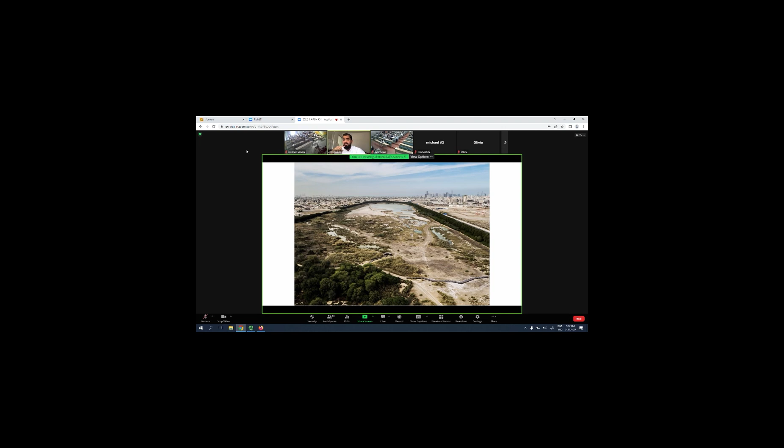But unfortunately, since it's in the middle of the city, many contractors started to use this site as a dump for their construction waste, and all these wonderful lagoons used to be a place where trash was left.

Unfortunately, it took a lot of effort to bring the project to its ultimate natural condition. So we started to put different strategies in place to tackle this, to conserve but also rehabilitate the whole area.

We started to create a wonderful buffer of trees to isolate it and create a clear boundary, stopping the encroachment of real estate developments. We have a lot of problems, especially in our part of the world, where overdevelopment is becoming a real issue.

You see everywhere being developed, used for real estate. It's really important to preserve and protect the natural assets we have. Such a case in the desert is very rare, and if it's gone, it's gone forever, which would affect the ecosystem since migrant birds come here.

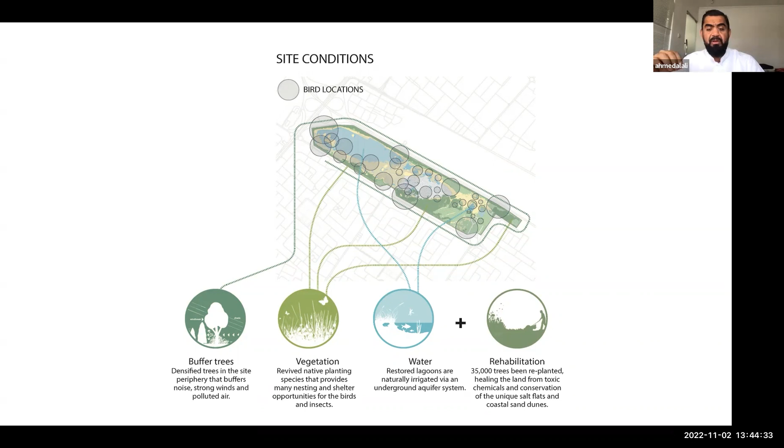So we started to plant almost 35,000 plants, from trees to shrubs, to heal the land. We restored the lagoons using irrigation naturally supplied via the underground aquifer system, bringing life back to the whole place.

As you see in this section, we started to create gradients. Of course when I say 'we', I mean the team of experts, landscapers, geologists, and specialists in bird behavior, creating this wonderful scaling down of the trees.

This created a gentle protection for the birds to feel very safe and be able to stay on the site, attracting these birds back to the area.

We also thought about how to make people aware of this beautiful site. It's not enough to do that, but also to educate people, the new generation, about the importance of such unique natural assets.

So we suggested creating a wonderful facility that could become a place for scientists or people who'd like to experiment, or bird lovers who would like to walk and view and examine the birds.

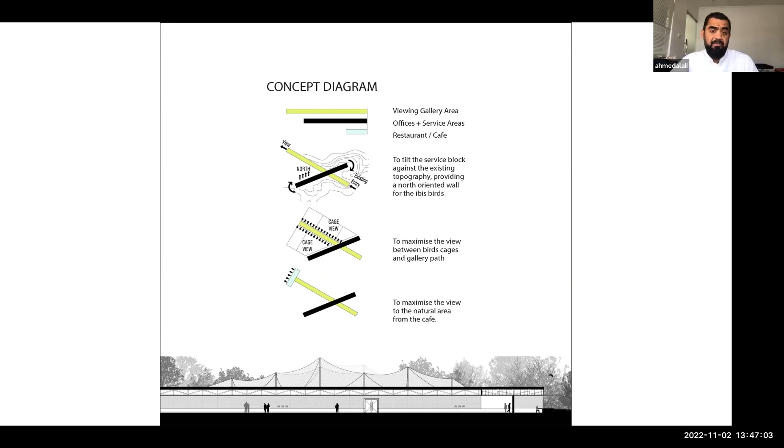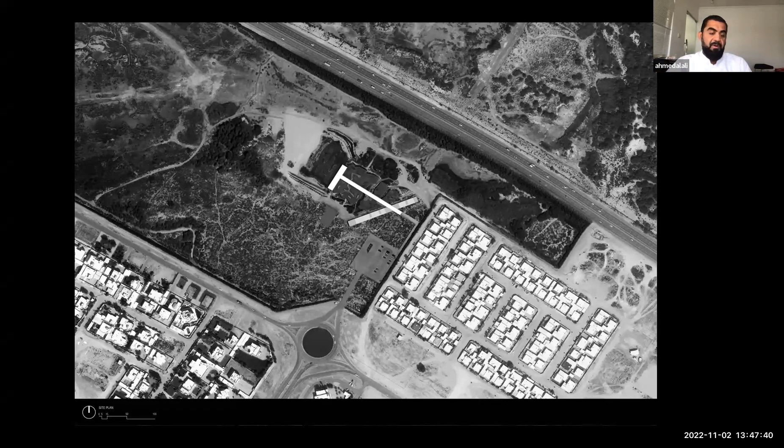So we decided to build close to the places that has already been damaged. We thought this is an opportunity to rehabilitate it also, and be able to limit the access of people at least to the beginning of the site and leave the rest for nature, but also educate people while they are in the facilities about the whole area and the importance of salt flats.

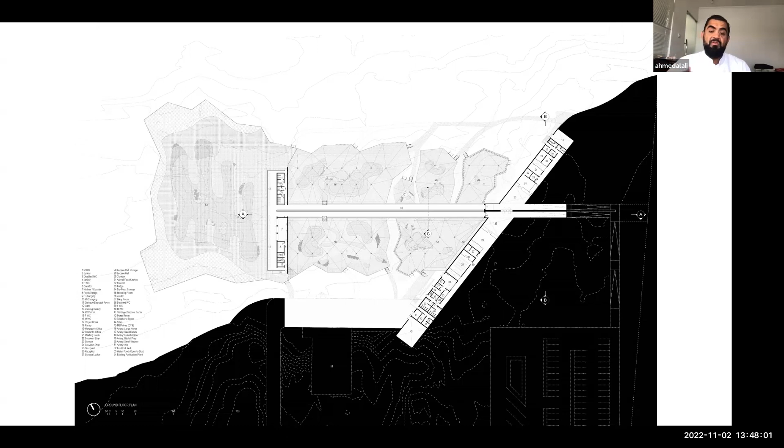Again, the design - I will explain the design. From the parking, we thought it will be interesting if you can really submerge yourself into the land and be able to enter into this wonderful world of birds. As you see in the section here, we started to create a very thin profile and submerge the building a bit, and create that kind of tent structure that allows us to free the birds in the larger, let's say, cage. So while you are walking, you are the one who are somehow caged in between the birds, and you could view them.

And that could be used, of course, in AC areas since it's very hot in our region. So even in the summer, you could use this facility, and you are the one who will be in an almost controlled environment, while the bird will be in its natural environment.

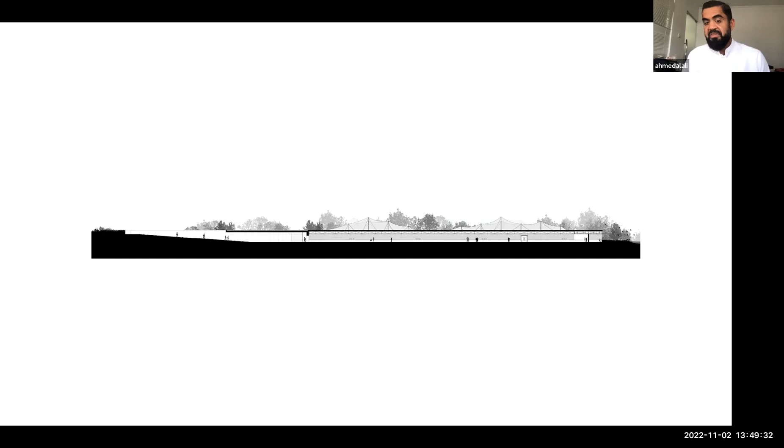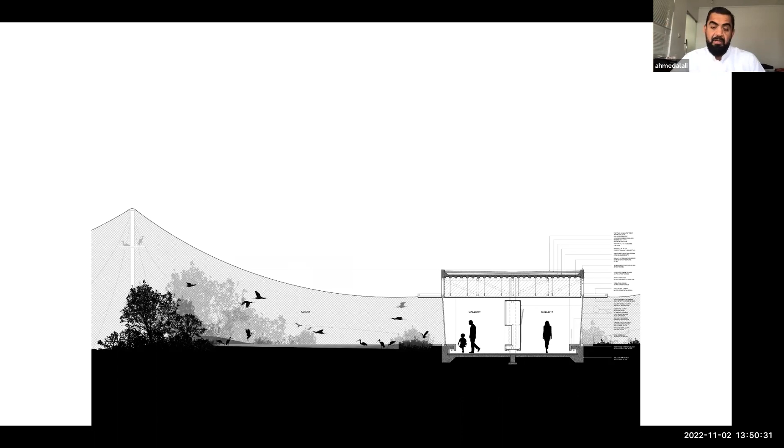What we did also - we produced this continuous seamless glass gallery, and we tilted the glass 5 degrees to be able to reflect the ground, so the birds will not really fly into the glass. This is a common problem when you have modern buildings, where the bird thinks it's a continuous space, so it usually bumps into the glass. So this is actually a small detail - that's the tiltation of the glass in the section here, and we created a darker room behind, so the reflection will be stronger, so the bird can see itself and could run away, and could also see the ground because of the tiltation.

Again, we started to bring the ground up - or the other way around, actually we sunk the walking areas. So the children have an eye level, almost an eye level, and relaxed level with the birds, so they could really see them very close to the gallery. And it's a nice feeling because you could feel the ground coming really.

I think in 2019 we took the Aga Khan Award for that project.

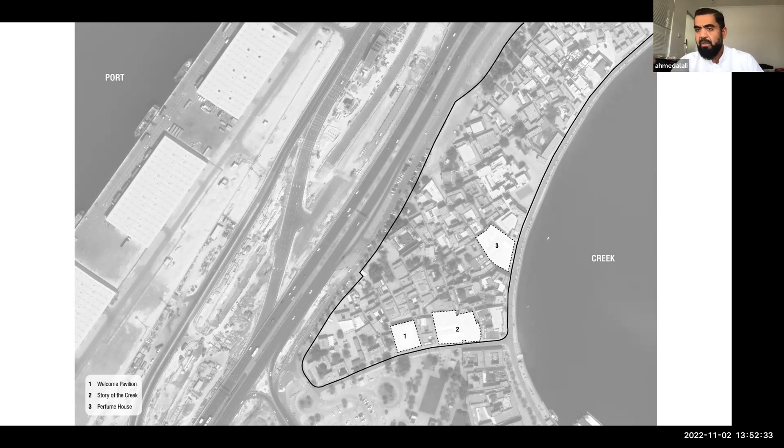Another project was in another context, which is the Shindagha area, where this beautiful vernacular architecture has developed around the seaside, the creek side. The client came to us and said, okay, we want to do something for Expo 2020, and we want to create one of the pavilions outside the Expo zone to receive people and make them aware of the traditional area.

So what we did - we thought, okay, it's wonderful, let's look at the history of this place and the materials that have been used, and what people used to do in that place. Apparently people used to have a good craft in carpentry and woodwork, building ships and creating also these barasti homes. We call it areesh - areesh is like a continuous roof structure made out of palm reeds. We thought that people used to be very skilled with wood, and this is really interesting.

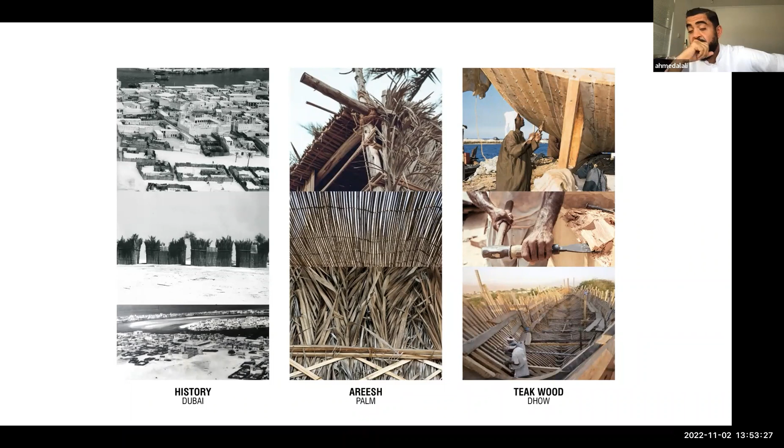They used to bring the wood, whether from the reeds or palm reeds on the surrounding oasis, or they used to bring teak wood from India and start to create ships with it. So we thought that, oh, that's interesting.

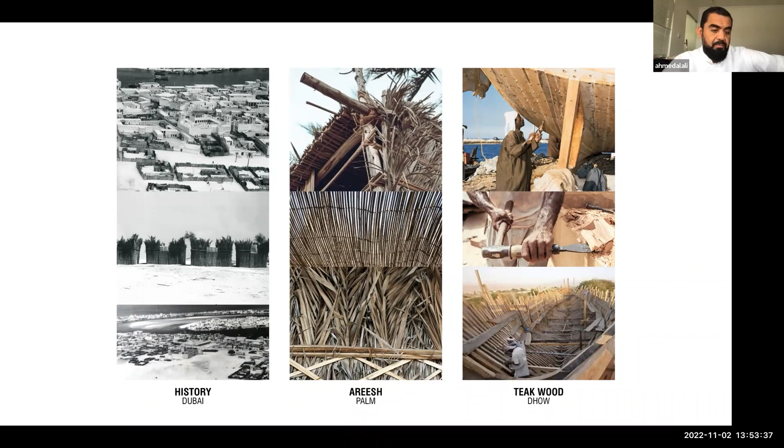Instead of really doing a modern building, there is a beautiful plaza where they want us to build this heavy kind of program. We said, all right, what about we create something that is very light, but also reminds people, in its form and meaning, of the craft and type of architecture used in this area, not in a literal sense, but in a creative and indirect way.

So we thought of really building a wonderful roof made out of teak wood to remember the crafts done in this area, but also arrange it in a way that could resemble the Areesh and create that kind of wonderful imperfection between one piece and another, allowing beautiful shade and shadow to cast on the ground.

And to control that environmentally, we started to think about a simple enclosure that can be folded and unfolded in the plaza, so areas spill into the plaza in the winter time, like now, November, December. But in the time of extreme heat, August, July, we could really enclose it and create a kind of enclosed AC space.

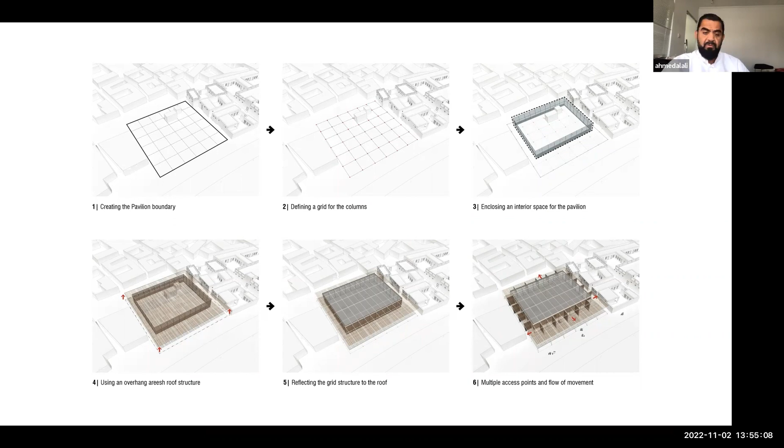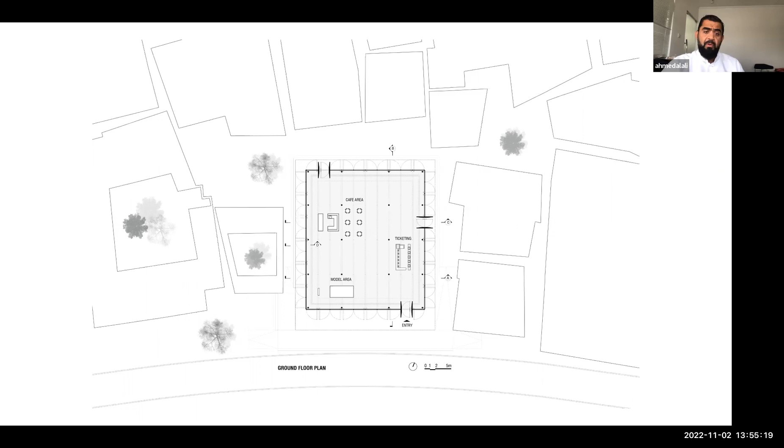So this is the plan, very simple. We intentionally kept it an open floor plan, so it does not disturb the surrounding mud buildings.

For the services, every building has a tremendous amount of services for AC, electrical, and so forth. In our region, usually the AC and ducting take a huge amount of space in the roof. If you want a nice, interesting roof that allows light to penetrate and create shade and shadow, you need to free the architecture as much as possible from these mechanicals. So we said, what about we create this kind of tunnel that is enough to service the AC and electrical wiring, and keep the plaza really open.

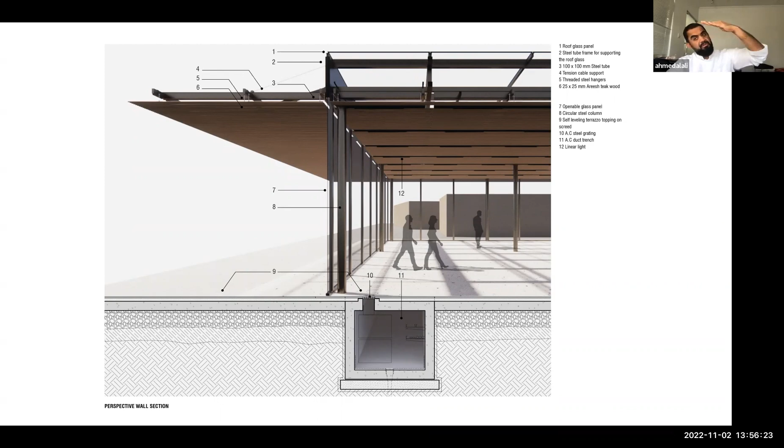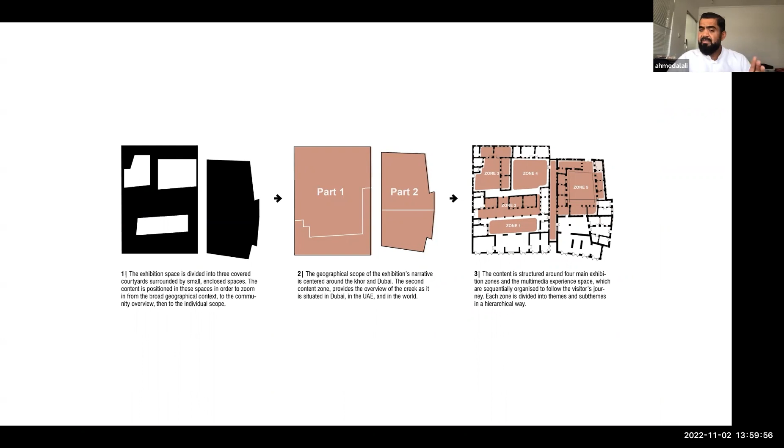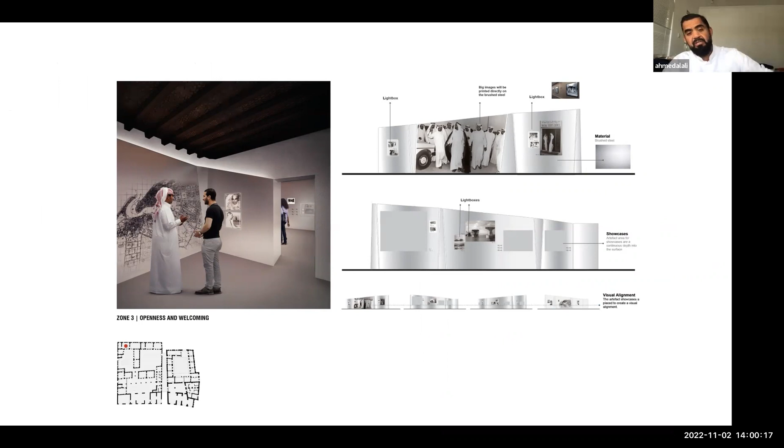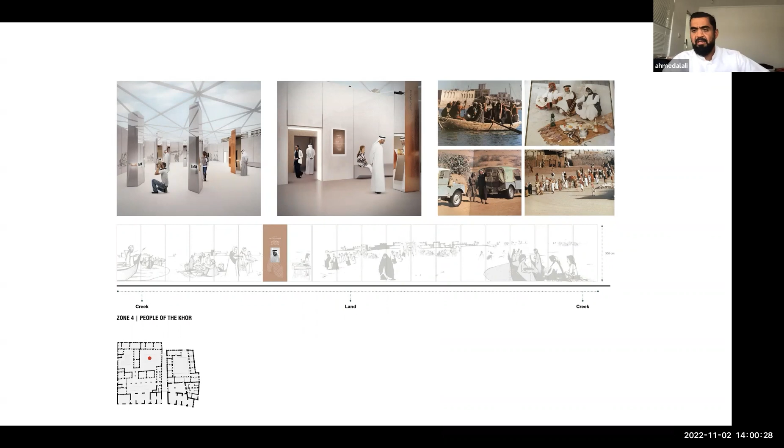Again, in the surroundings, we were responsible for turning some of the traditional houses into museums. One is a museum of traditional perfumes, and one is a museum of urban planning. So we started to take each building, understand its potential, and how you can reuse it for modern functions. There is a limitation to what you can do, but you can deal with it in a respectful way and empower some of the spaces, expressing some of the architectural elements around it. We used interpretive design, working closely with graphic designers on interpretation and storytelling to create and empower the space we were looking for.

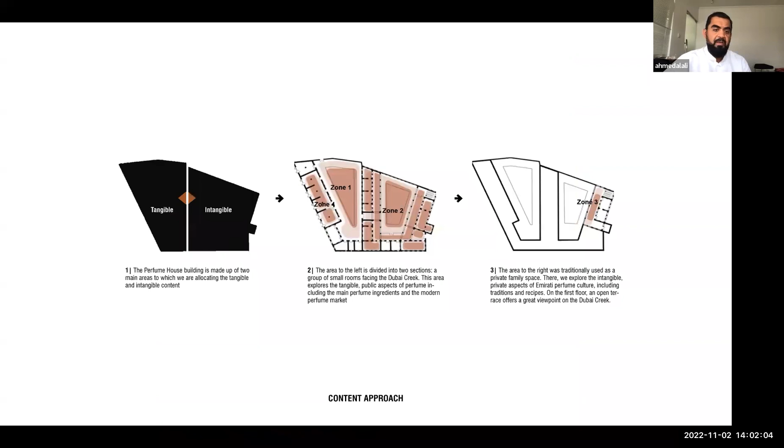Again, that's another building with also other challenges, turning some of the spaces into a usable modern gallery.

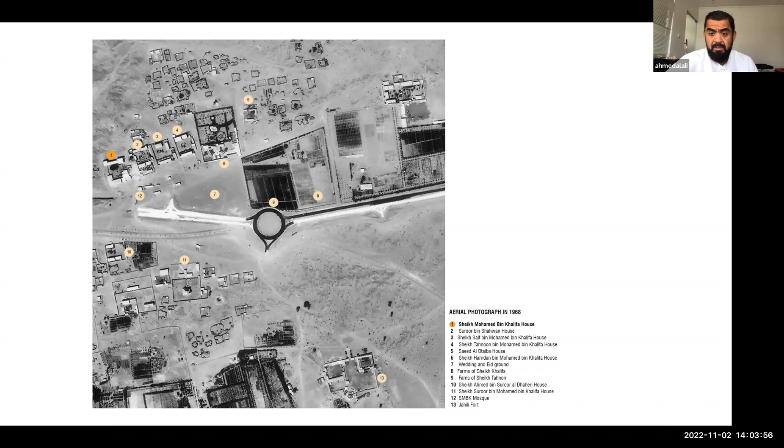Having said that, that house had been neglected for a long period of time. It's a house built in the 50s, built over time, and not built in the traditional form. Actually, it's an imported form from India and the coast of Zanzibar. You can see a lot of this kind of arcaded, wonderful arched palaces.

Having said that, it's a very important part of the modern history of the UAE. And it's built with concrete. We thought it's an interesting idea because it's built with concrete but also around a courtyard, which also resembles a kind of social form of architecture. It's been imported from India, which means there is also a history of culture in dealing with trade and all of that. We thought it was very important to keep that house for the legacy of the UAE and its multicultural connections to the region.

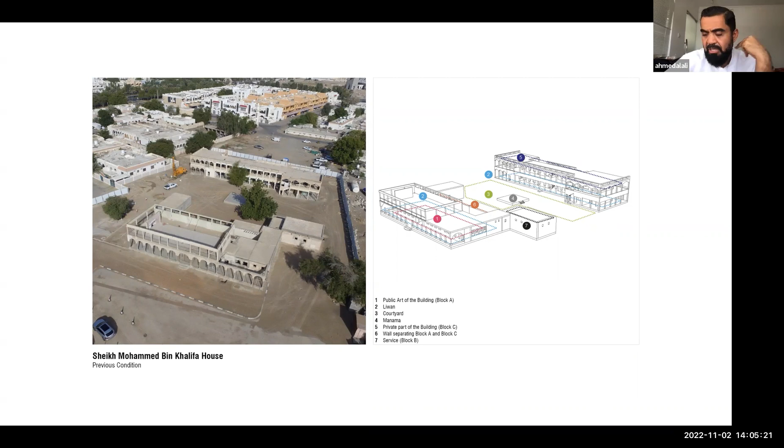So we started to document with the team of conservation and heritage people, and started to see the phases the house had been built in since 1957. It was built over time, using different kinds of methods.

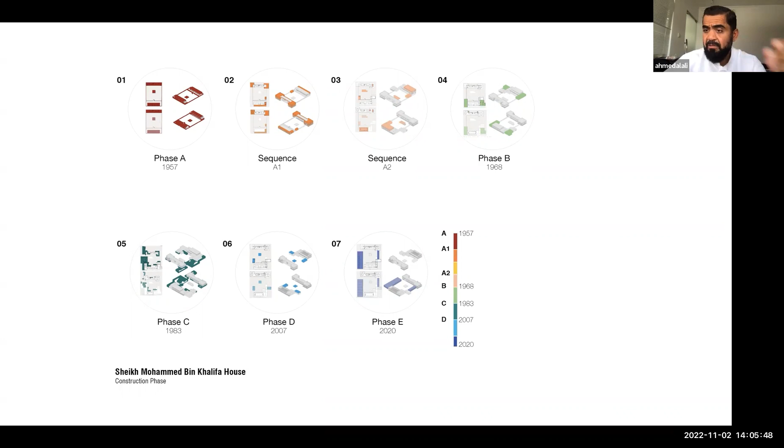Every time the client was expanding it, and we thought this is interesting because it's part of the history of the design itself. So Sheikh Mohammed bin Khalifa House, this is the condition it was in.

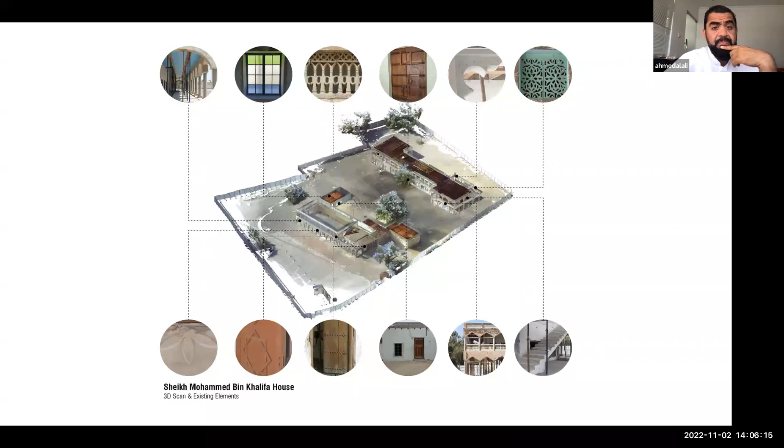Unfortunately, the roofs had collapsed, and most of the rooms' roofs had also collapsed. Some walls had also collapsed. If you see the smaller images, this is the condition the site was in. These are some images too. It was in very bad shape and required conservation in a big way, and also rehabilitation of the program.

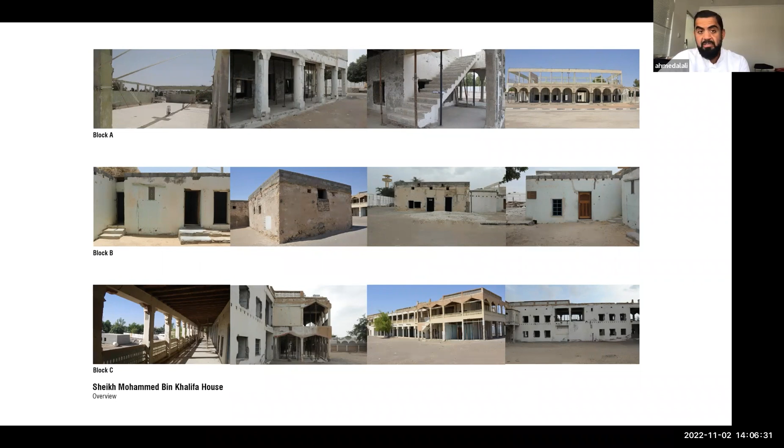So we started to categorize the beauty of the place, the materials, the colors being used. It's wonderful because wonderful palettes of materials have been used, wonderful palettes of geometries have been used. There are colors that are really striking, like a blue, sky blue color, or sometimes a light green color, and pink has been used in some of the rooms. We thought it's something to really keep in that heritage of the building.

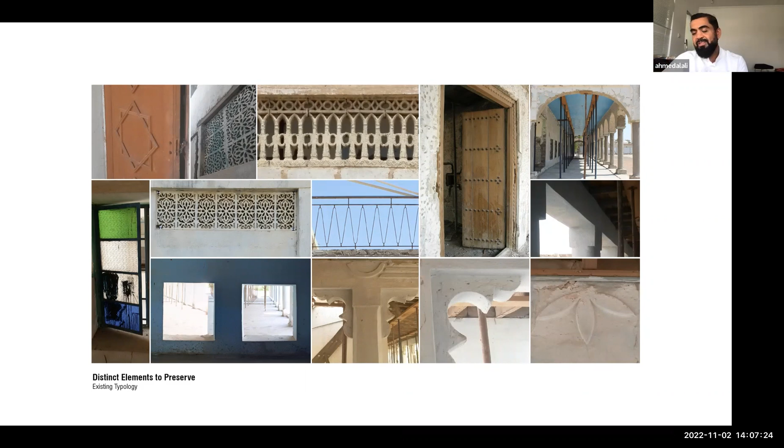Yet the doors, for example, if you see the wooden doors, are done in a completely traditional way. So we started to conserve, minimizing the work in areas that we are having destruction.

We started to conserve some of the decoration and elements, repair some of the things that had been damaged, like the frame in this case here. We started to repair it and replace it in the way it was originally designed. But then we come to places where we cannot repair, only replace.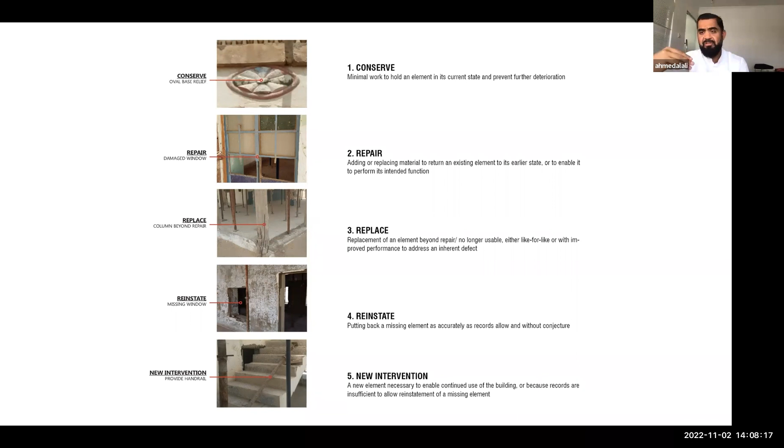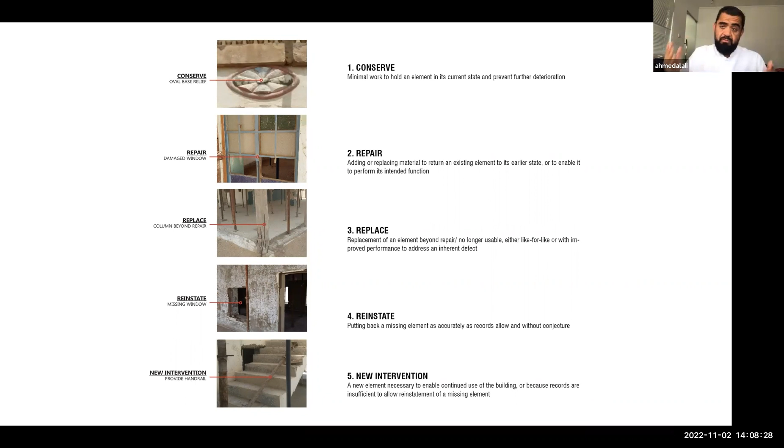This is the strategy that we have used. We started to replace some of the elements. For any elements required to replace, we chose either to do it the way it was, or we had the freedom to reinstate it and do something modern and interesting, but yet sensible to the place.

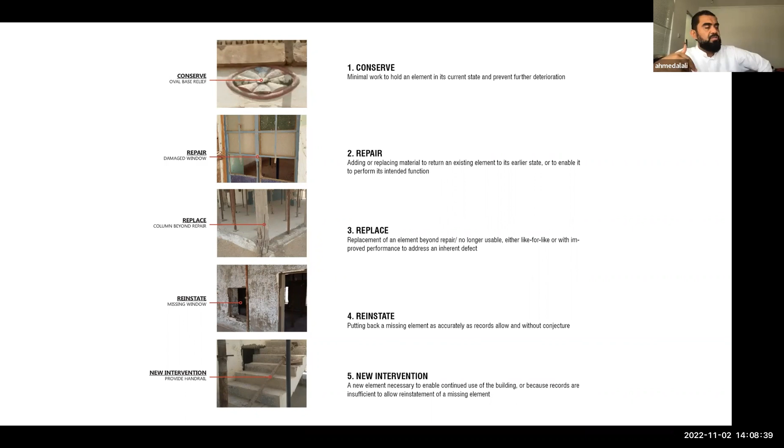And then there's the new interventions. We wanted to make it a modern facility, so we suggested creating an extension too for the development, so that it could survive, have a new life, and be valid too.

Here is the materials that were also existing on the site. Looking at it case by case, there's a lot of materials: earth, masonries, concrete, wooden beams and roofs, wooden doors, concrete blocks, and so on.

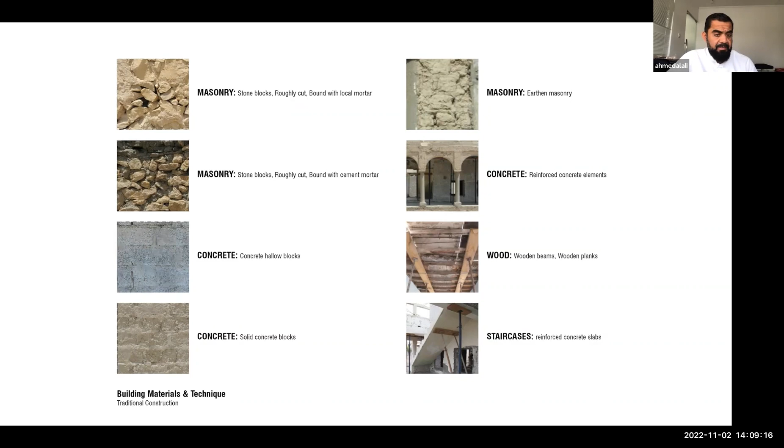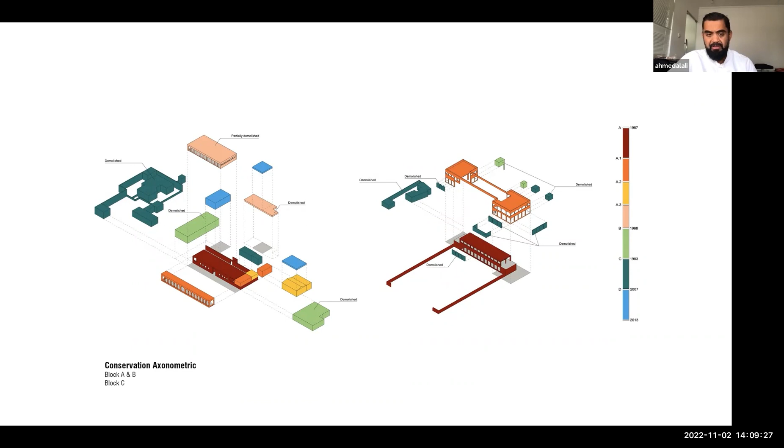Of course, these kinds of strategies have also been reflected as a diagram in the strategies and in the spatial strategy. Again, these are some of the elevations of the existing structure. We started to learn from the proportions of it, the arcade proportions, and so on, and this helped us in designing the new structure.

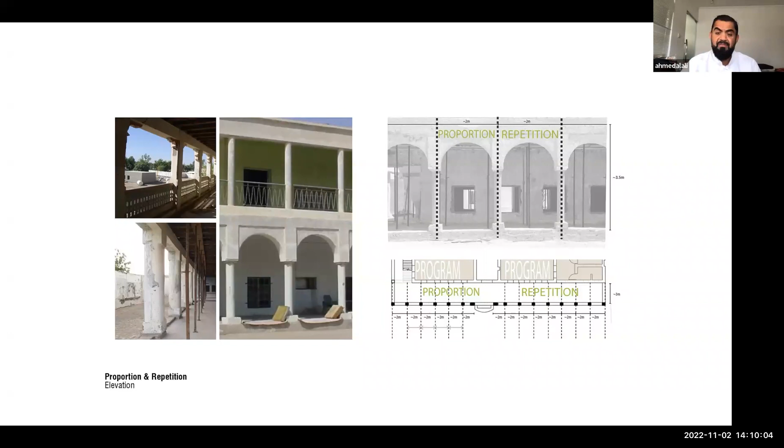This idea of modular repetition, and this idea of layered spaces of arcade and circulation, and then the main space to create shade and a sense of privacy, is something we learned in our formation of the new architecture. We started to design the whole thing, reinstating the courtyard in the middle, softly bringing that arrangement of the courtyard into the architecture.

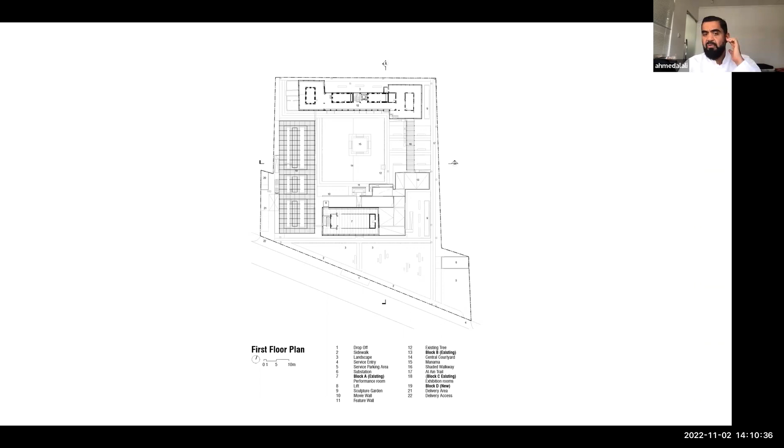But also, if you see on the left side, we produced a building that encloses the courtyard again. Instead of rebuilding the wall the way it was, we made a building there that could serve as an attractor to this area, but yet sit in harmony with the whole thing.

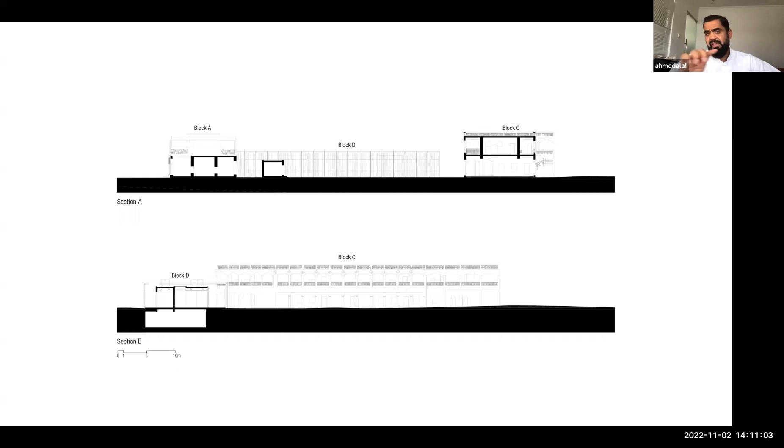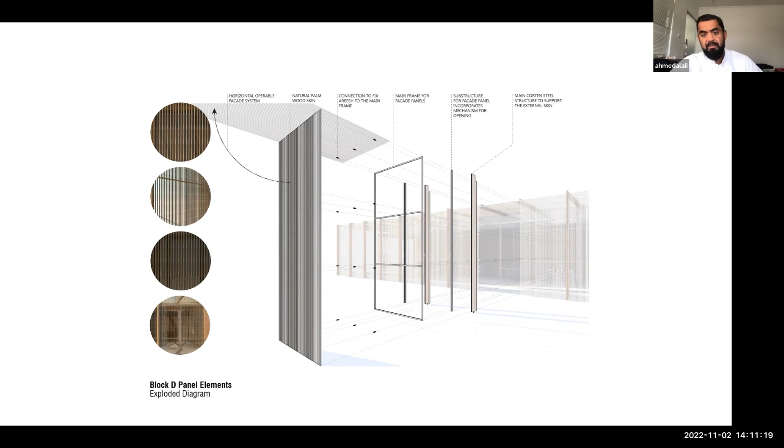Again, respecting the scale, as you see, Block D is really taking that modulation of 2 meters, and this idea of the layered arcade, the scale of the first floor, connecting almost the courtyard in position. Here you see some inspiration from this kind of mashrabiya skin treatment of the second layer, and how the section creates a space within another space, to create environmentally controlled areas, but also that kind of spatial quality that exists in the site itself.

We used, by the way, a new method of compacted sand to give this feeling of sand. We didn't want to create a landscape that is very heavy, so compacted sand was a nice solution to maintain the quality of the space, how it was before.

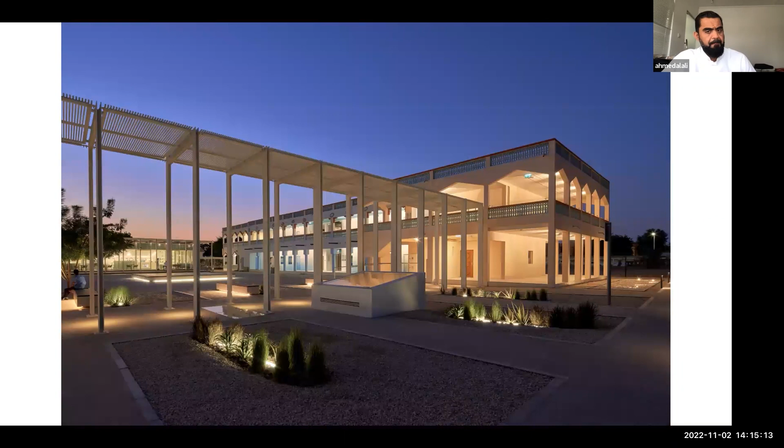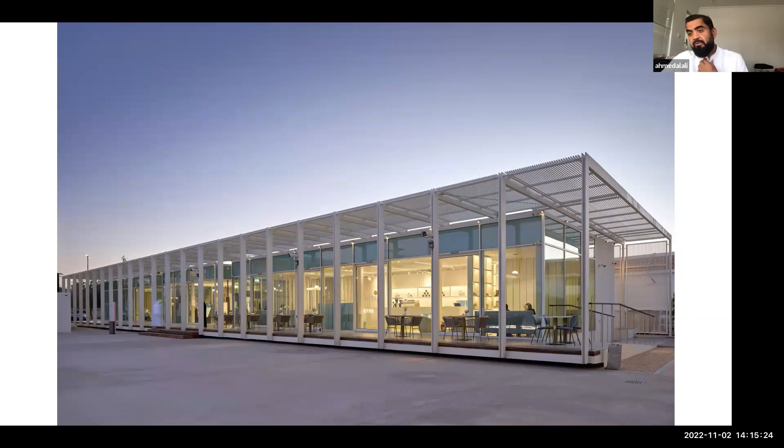This is the project at night. This is the new block. Still, it was not finished yet when we took this photo. Now it's finished with this wonderful open and close skin. Yeah, maybe it's time for new photos.

All right, the third project and the final project that I want to show today.

As an architect, you don't have control over what comes to you, you know. At the end of the day, you are not an artist. Maybe as a researcher, you can do that, pick something, and do an academic project. But as a practice, you just receive things, and you start to think about how you could deal with this kind of realistic project, realistic client, budget, and site.

But sometimes, you know, crazy things happen. Sometimes somebody comes to you and says, I want to build that building or that resort in the empty quarter. And the empty quarter was for a long time in Saudi Arabia an inaccessible, uninhabitable piece of the desert. It has huge sand dunes, sometimes up to 200, 250 meters, and no water.

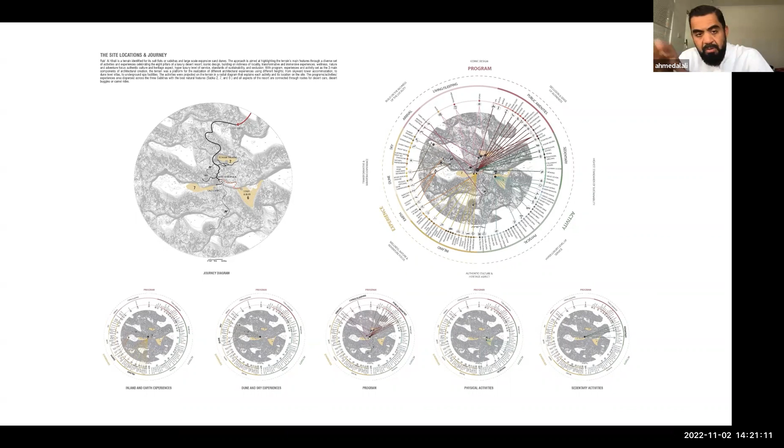That dialogue helped us rationalize some of the sites we chose, between the second, sixth, and seventh sabkha, as we call it, for the ultimate program use, but also for the different experiences.

So we started to say, alright, maybe the inspiration will be using this wonderful, abundant material, which is sand. When you walk in the desert, you leave usually a footprint, your footprint becomes very obvious. It's very minimal, but very obvious.

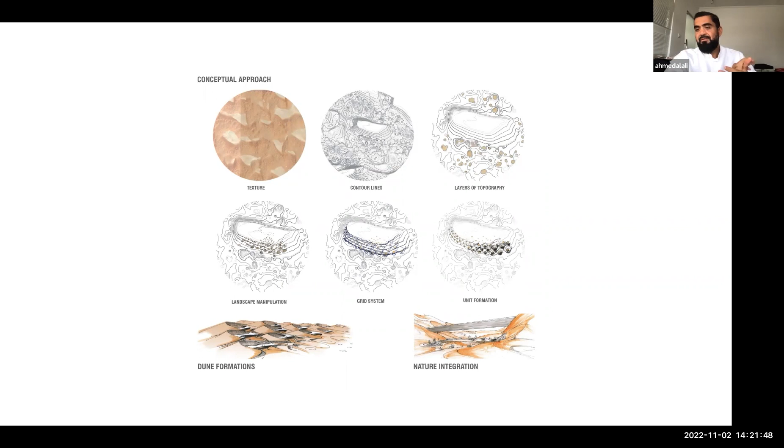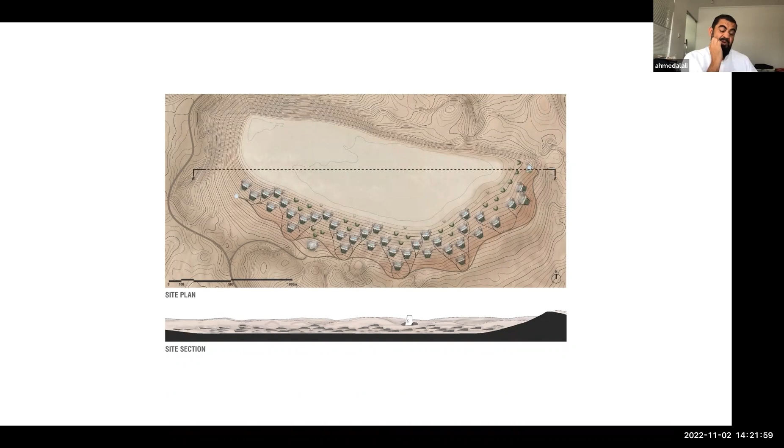We thought it's an interesting concept, this athar, that you leave almost a bulge in the sand or in the material. That could also create a frame or a space that we could use, as you see in the section below, where we used one of these wonderful topographies to create these bulges, to create that kind of space within it.

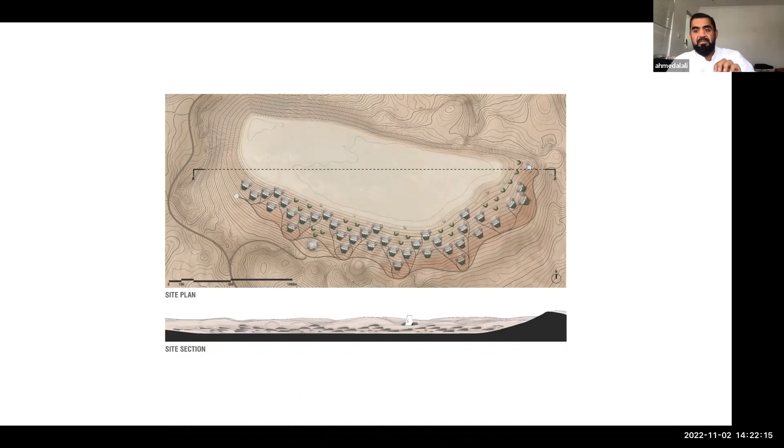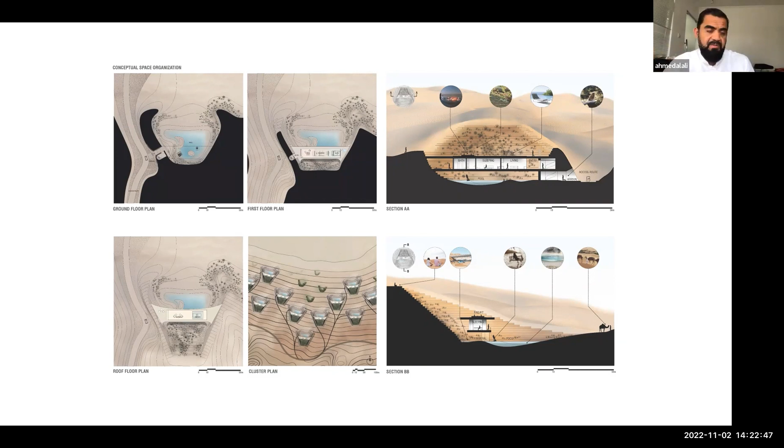From the same material, you organize it and push this kind of space, and that gives us the ability to create a microclimate. We worked with the engineers to create a condition where humidity is increased in that area, creating a microclimatic condition because of the shade and the humidity level. That allows us also to create an architecture suspended in between this kind of move, which becomes a space of privacy, leisure, and so on.

So we started to use these spaces, and as you see, this is a kind of very minimal intervention on the overall.

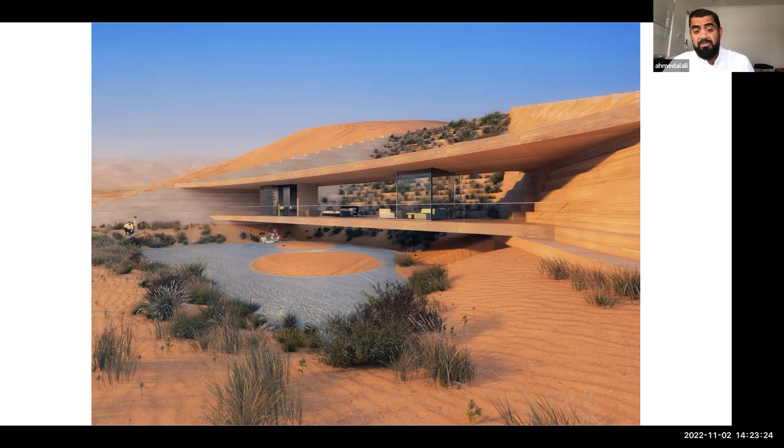We thought also the water that's been generated underground could be turned into sweet water and used to rehabilitate some of the landscape, or to use it for a kind of landscape pleasure. Some of the ideas we had.

Also to learn from nature itself, from some of the existing plants there, and how this wonderful plant shades itself and creates these layers. The flower, or blossoming, is used to protect the main core where all the water is, and it gives it this wonderful vertical shape and layering shape.

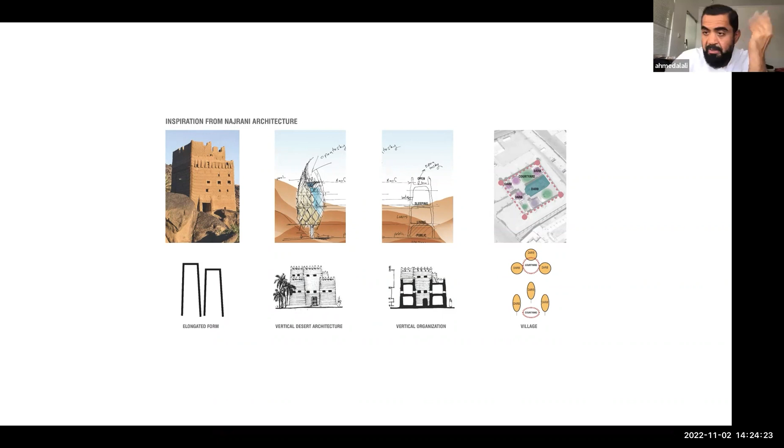We thought it's really interesting that when you think about building in the desert, you usually think of building from the ground, from earth, like the first proposal. I said, what about thinking outside the box, but also learning? Usually when you have defense architecture, you go vertical, so you can view the maximum kind of land, see the enemies from far away, and also defend yourself against that enemy.

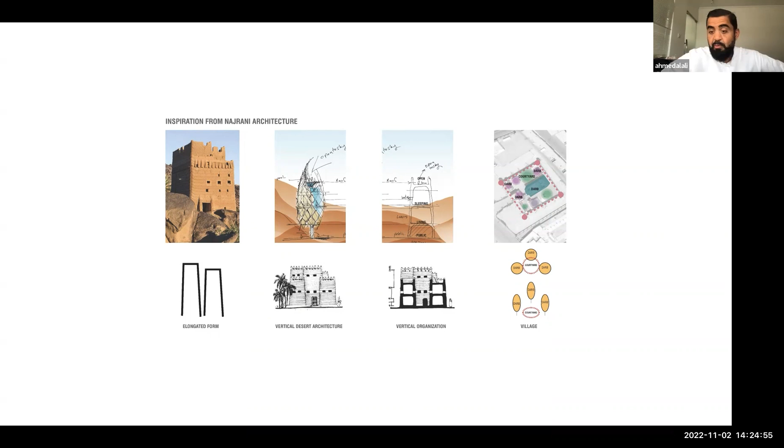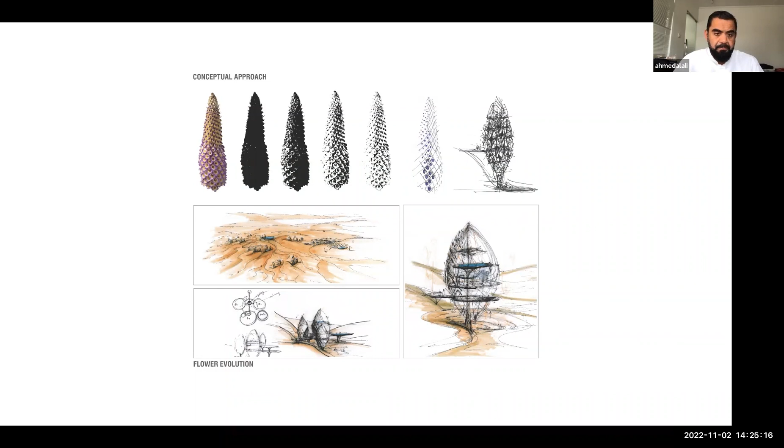We wanted to create a vertical unit that can view and experience that vastness of the repetition of sand, and appears like it's growing from the site itself, growing from the plant itself.

We wanted to maximize views and use this idea of layering to protect itself and create privacy and viewing. That's why we created this double skin, one protected from the harsh environment but also flexible to open for views and air.

We started to organize it around the dunes, and it became something that's not alien to the whole thing. It works really interesting with the surroundings. Yes, it's bizarre, or strange.

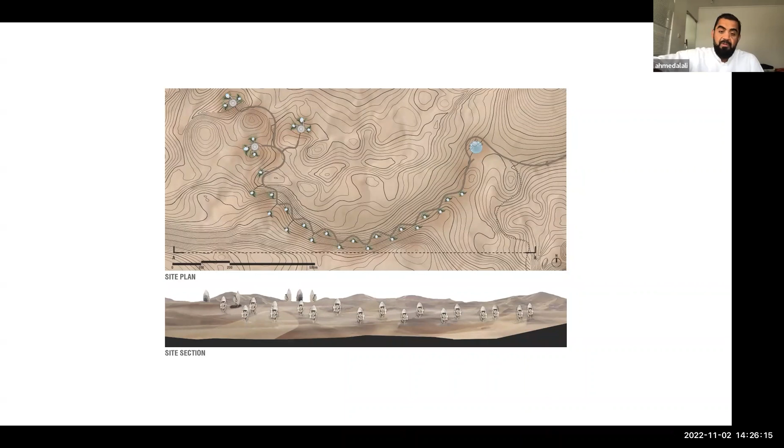Like the flower, all of a sudden you see this vertical flower in the middle of the desert. But it's wonderful, and it allows you to experience the place in a different way.

This is where we used one of the arcs created by the dunes, and we built on it, so we have this maximum wonderful view at night, viewing nothingness - you're viewing emptiness.

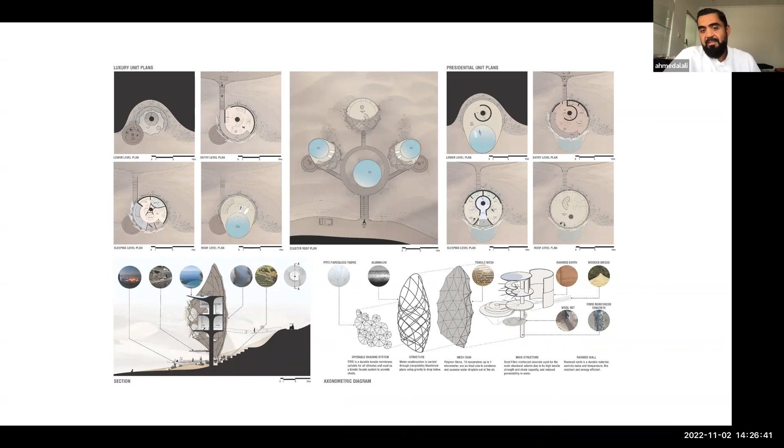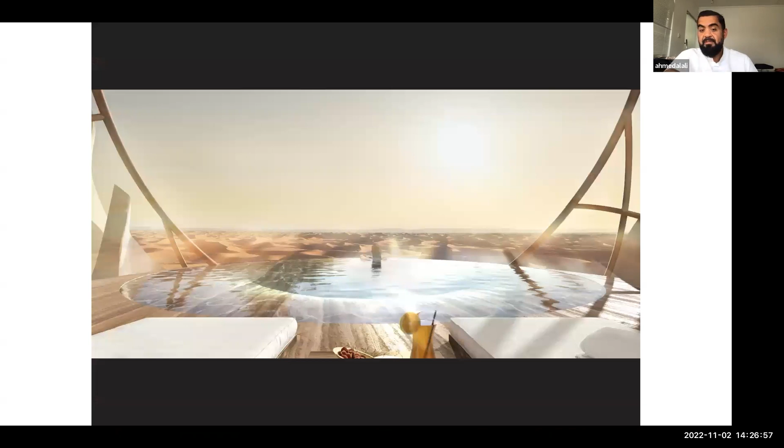We also decided that the most beautiful place is the roof, so we created a reflecting tissue of water that reflects the sky at night, and you could be submerging yourself. Imagine that pool at night - it's wonderful, reflecting the whole sky. But also during the day you can see that horizon.

That's an actual view, by the way - taking an actual height of view and then redoing the design to it.

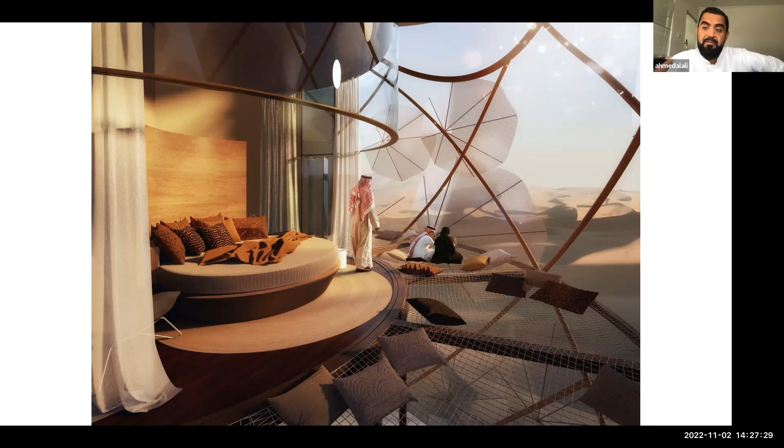Even between the skin and the room, we started to say, okay, what about we produce this kind of net that allows us to enjoy it in a different way.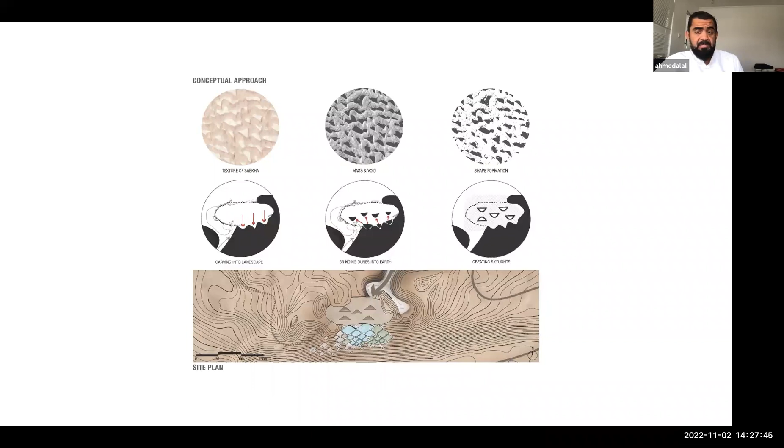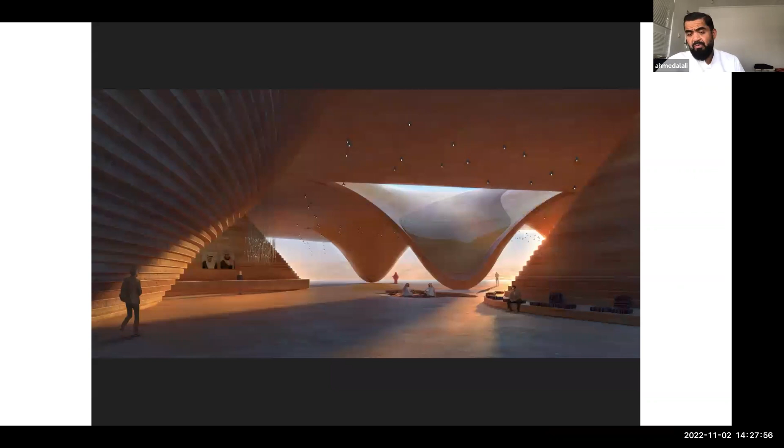Again, learning from the patterns that exist on the dunes, we started to make the main hall and create that kind of zigzagged shape to form the main grand room. This is the place where all the people gathered.

Resorts sometimes need places like a spa and gym and so forth. So for the spa, we thought it would be interesting to take inspiration from the materials that exist there - in this case, salt, which also has healing properties and is used a lot as treatment.

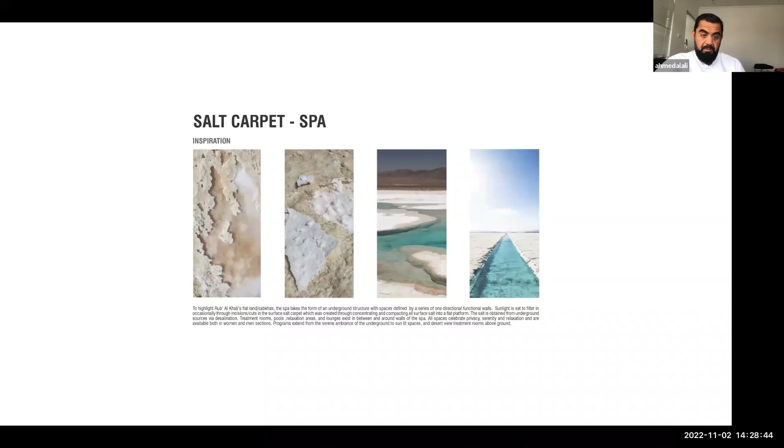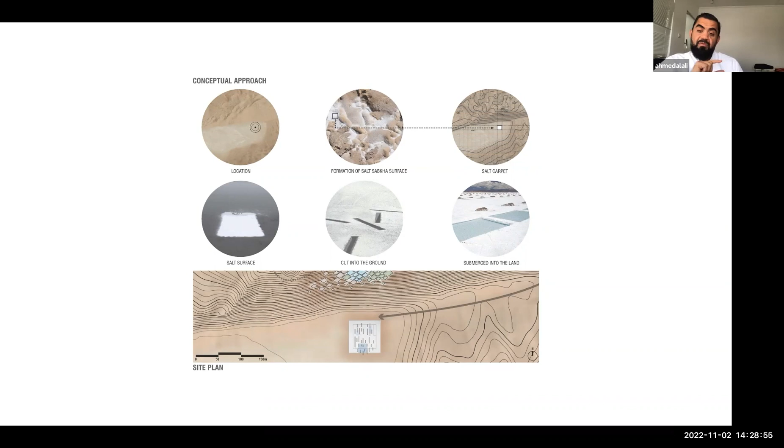So we thought maybe that could also be a material, and we started to create a salt carpet. We used this material to create above-ground, almost floating pools and a carpet.

When I say carpet, it's by condensing all this material into a specific square. You'll highlight, and all of a sudden you see a white square from the same material that already exists as salt, but in an intensive way, and it becomes really obvious all of a sudden.

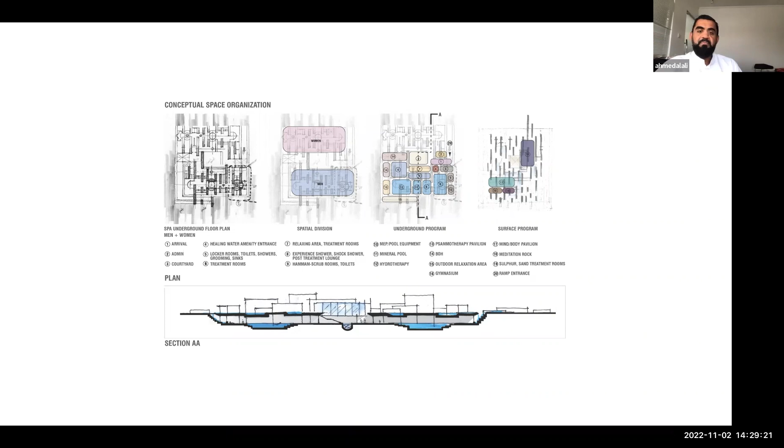Then all the treatments will be buried underground. So the result became this, and as you see here, how the water and everything is being arranged.

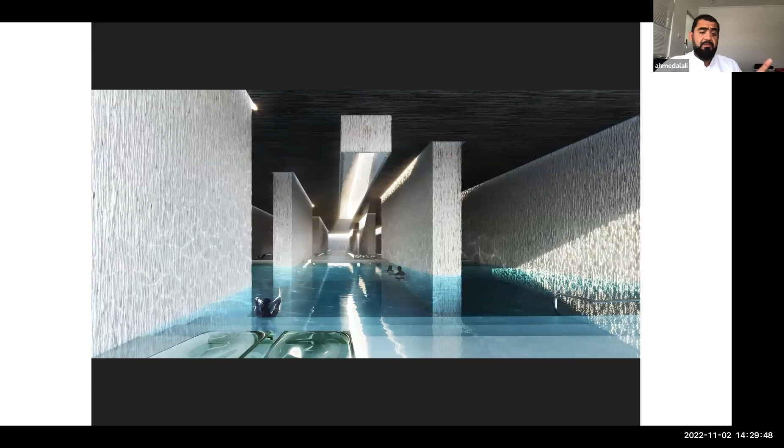With these walls, underground is darker and has a complete contrast, which I think is interesting in the desert, to have this complete contrast.

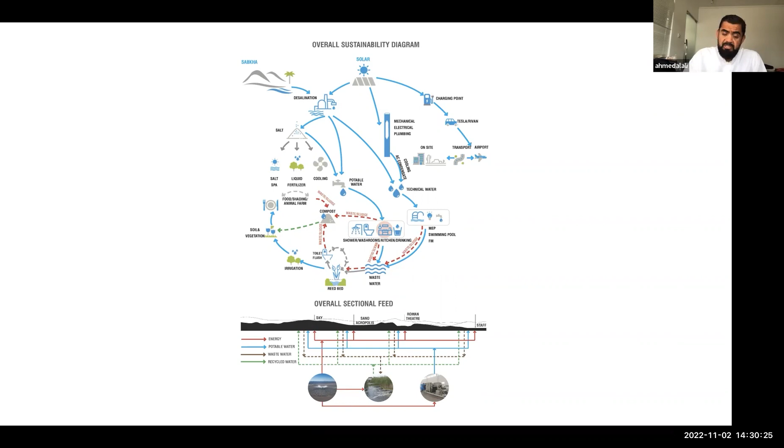We also started to think about an overall sustainability diagram - how we could really create a system that utilizes every resource and material we're using back into the circle of use, to achieve maximum efficiency of using energy.

Thank you very much. I hope you enjoyed it.